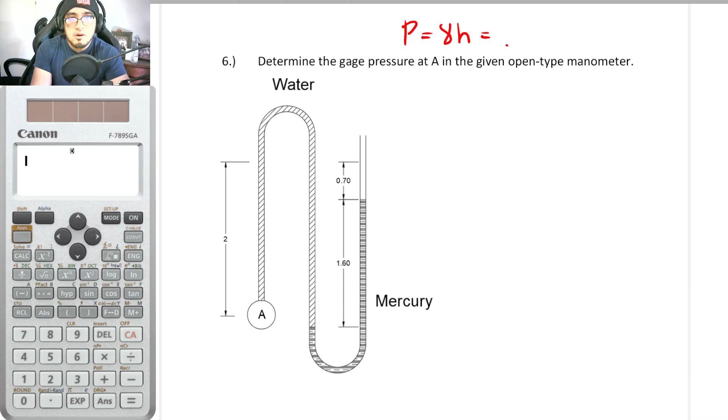Last video lecture was about pressure. Before watching this video, please make sure to have finished the previous video lecture, where we introduced pressure. Pressure is basically equal to unit weight times height, or if given is not unit weight but density, it's rho g h. Rho g is basically just unit weight.

So here, we will now determine the gauge pressure at A in the given open type manometer. This is what you call a manometer, and it is open type because it's open at the top. When it's open, it is subject to atmospheric pressure, which is 101.325 kilopascal. But in this problem, we won't deal with that.

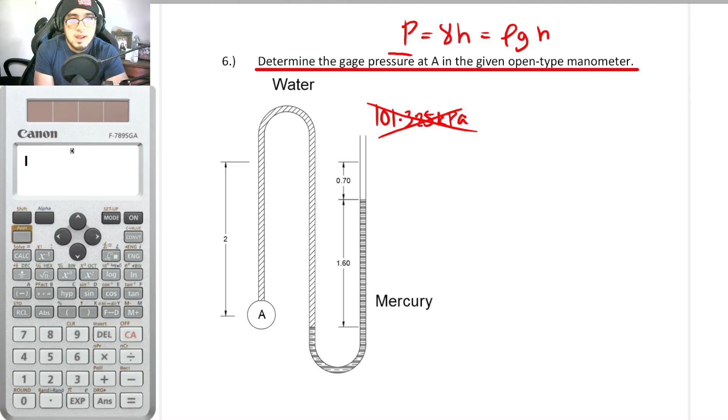That is because we are determining the gauge pressure. In the previous video lecture, I explained that for gauge pressure, the atmospheric pressure should not be included. So whether it's open or not, the atmospheric pressure is not included in gauge pressure.

So how can we deal with this kind of problem? Since rho g h, or unit weight times height, is how we solve this, how can we solve the pressure here? In this part of the manometer, since there's fluid here, of course its weight pushes downward. That is its weight.

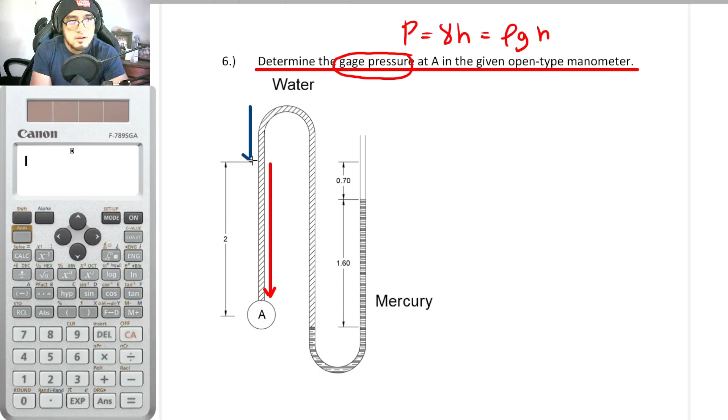As for this one here, it's the same, from this point to this point, going down. That is for these fluids here, going down. However, for this one here, on the other side, up until here, it also goes down. Actually, all of it goes down.

And as for this fluid here going to this point, up until this point, it also goes down. Then here, at this part, it goes down as well, and so on. Actually, all of it goes down, so what is the difference between them?

Take note that this is mercury already, and this one is water. As you can see from the hatching, they are different. So how can we solve for this?

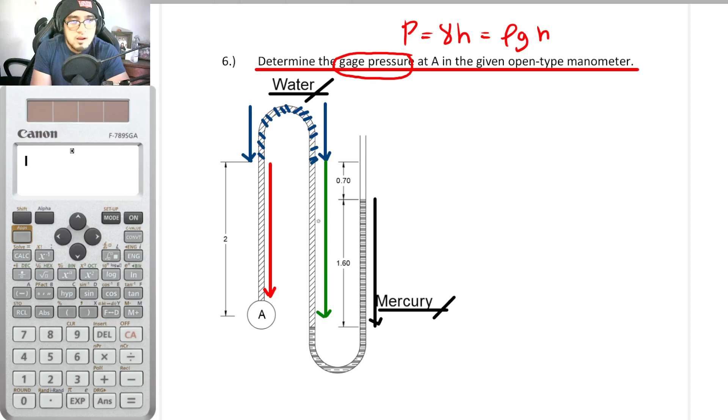For this red part here, the pressure is positive because it is compressing. As for these green ones here, it is negative pressure because it is pulling. So how does that work?

So for us to explain this properly, let us treat this manometer as a straight line. Let me write it on the side. If this is now a straight manometer, let's say this is our gauge value A, and let's make the tube straight. For example, this is the tube, or this is now the manometer.

So let's say that this is the tube. Then let's say that this is now the 2 meter mark, so this is 2 meters. Then whatever this is, I don't know what it is since it's not labeled. Then we also have 0.7 plus 1.6.

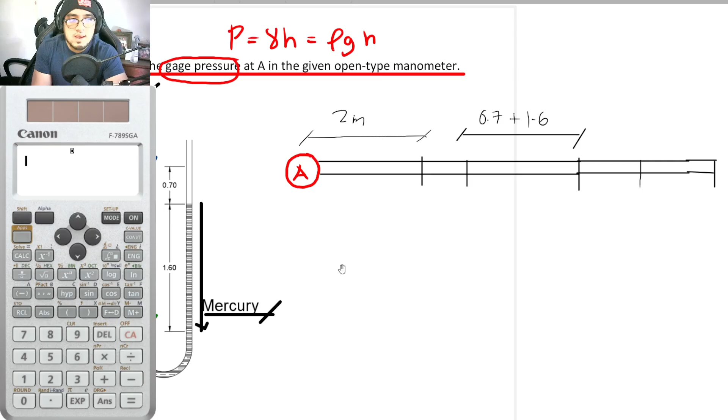Then this 1.6 of mercury, let's say it's around here. So this is now the manometer stretched out. Now that the manometer is stretched out, as you can see, there is a red pressure going to our gauge A. So with that, we again have a pressure, let me repeat.

So we would be having a certain pressure going towards this direction. Then we have this blue part here, going towards the direction of the gauge, which is here. So it goes towards here. Then we also have this part that goes away from the gauge. As you can see, it goes downward but away from A. And with that, guys, that's it. So that's one.

And since, guys, we said that pressure is unit weight times height, and since this is one entity, which is water, and they have the same height, it means these two would just cancel out. So basically they have no use in our computation since they cancel out.

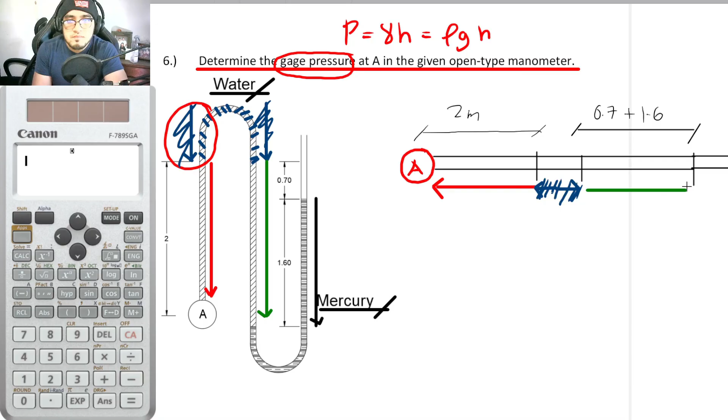As for this, 0.7 plus 1.6, that's still water. And as you can see, it is going downwards. But as you can project, it now goes away from A. So this green part goes away from A. And thus, this is its projection. So it goes away from A.

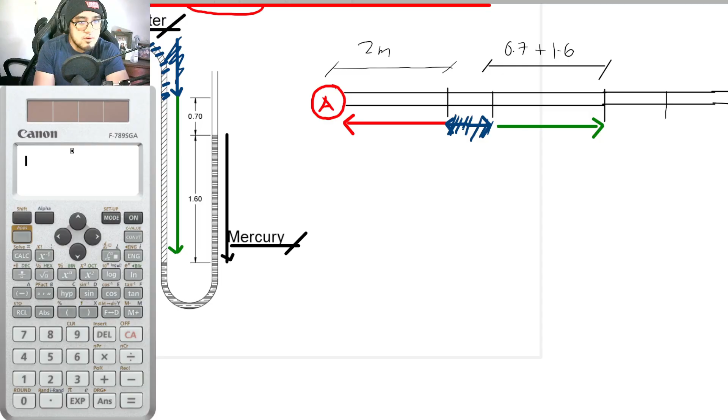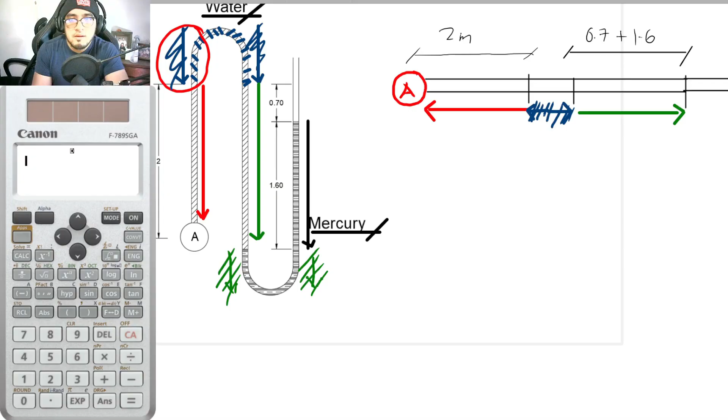As for this one, it's the same. This part here has a downward direction, and this one also has a downward direction. It means they would just cancel out. So this part here goes here, then goes there. So they cancel out as well.

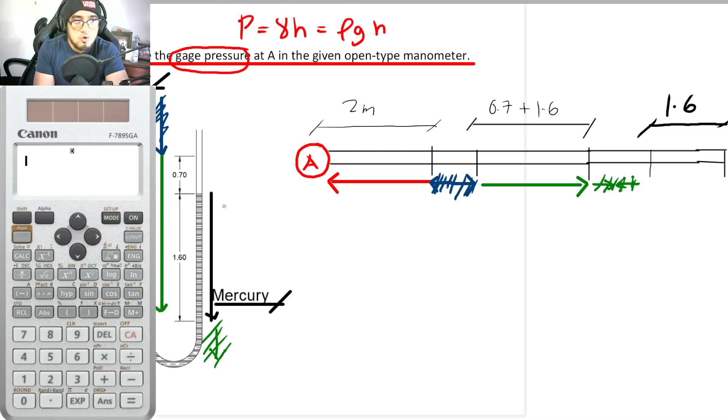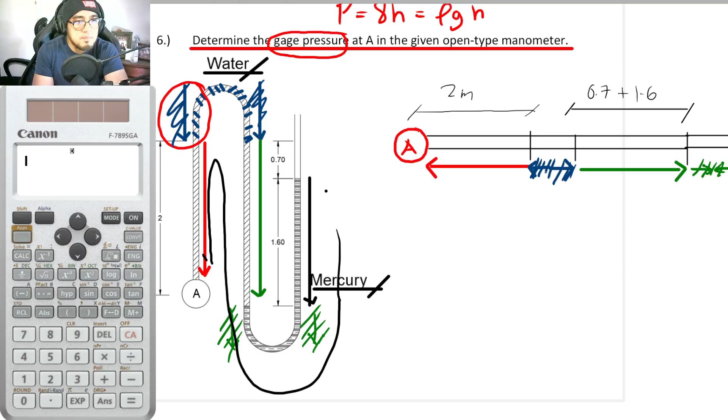And for us to get the pressure at A, we'll place an arbitrary point here, let's say this is also A. What color looks good? Let's use yellow. So this is A, let's say. This is the pressure of A.

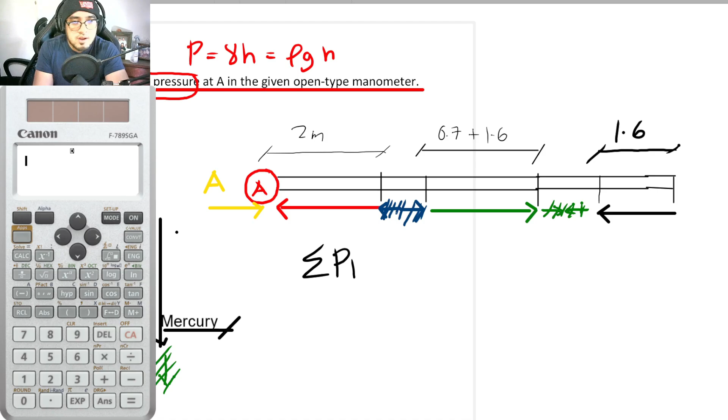Then summation of forces, I mean summation of pressure, horizontal is equal to 0. Let's say to the right is positive. So we have A, minus pressure of water here, then plus, since it's to the right, plus pressure of water here as well, then minus pressure of Mercury. So this is now equal to 0.

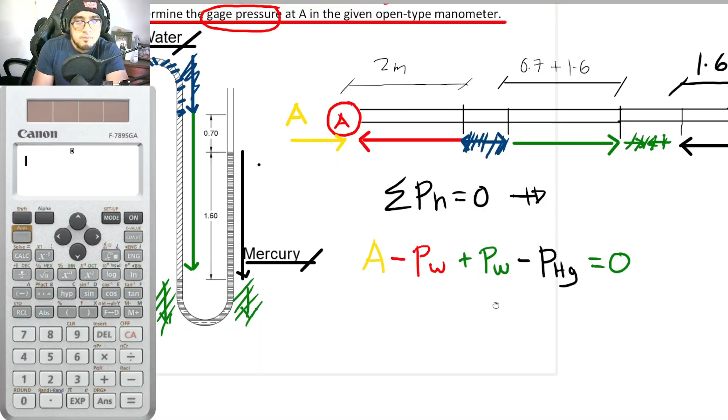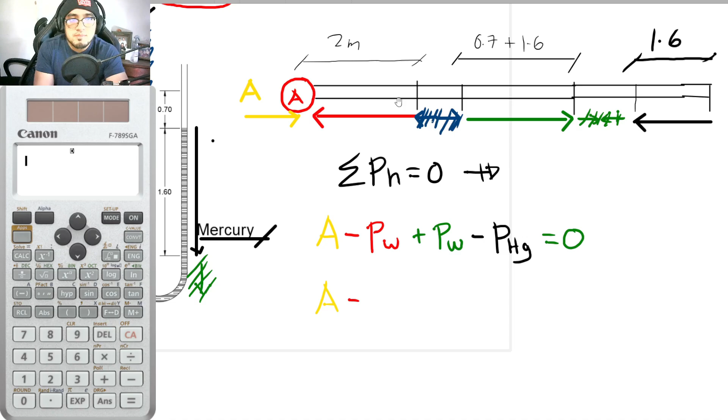Okay, so substituting known values, so still A. A minus the pressure of water at this particular portion, this red portion. So basically that is unit weight times height. The height is 2 meters, and the unit weight, since this is water, is 9.81. Then the height is 2. So plus.

So what is the pressure here? That's still water. So 9.81 times, what is this height? That height is equal to 0.7 plus 1.6. Looking at the calculator, 0.7 plus 1.6, that is 2.3. So that's 2.3. Now we have two terms.

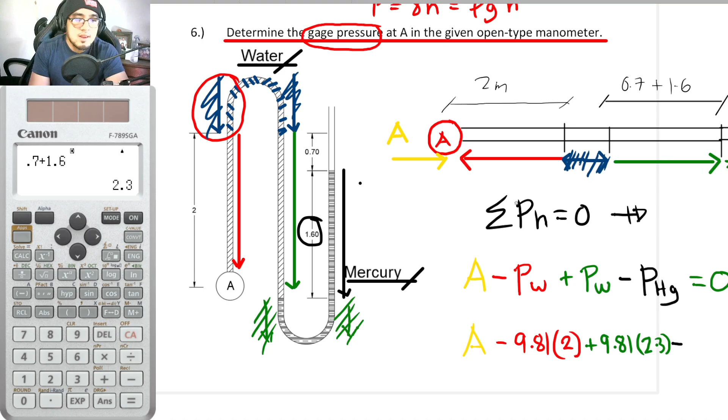And for the Mercury, minus this. So for Mercury, what is that? 1.6 is its height, and its unit weight. For the unit weight of Mercury, remember its specific gravity is 13.6. Unit weight is basically equal to specific gravity times the unit weight of water. So the specific gravity of mercury is 13.6 times the unit weight of water, which is 9.81. This is just the unit weight of mercury, so we multiply this by the height of 1.6, since 1.6 is the height of mercury.

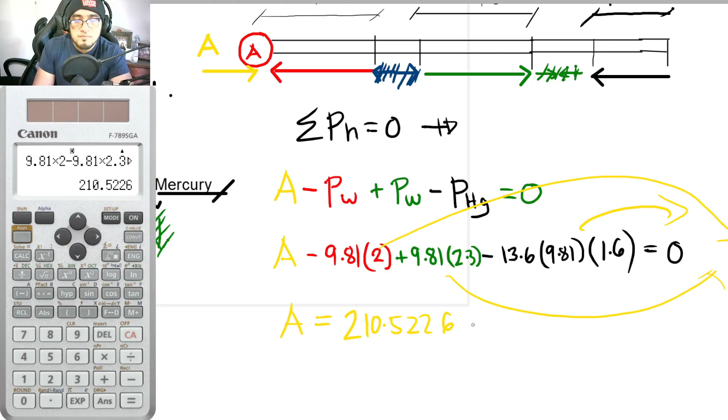Solving for the value of A. Looking at the calculator, let's transpose everything to the other side. You know how to transpose already, and with that the signs will just flip. So 9.81 times 2 minus 9.81 times 2.3, plus 13.6 times 9.81 times 1.6. Our answer here is now equal to 210.5226 kilopascal. So that is our final answer.

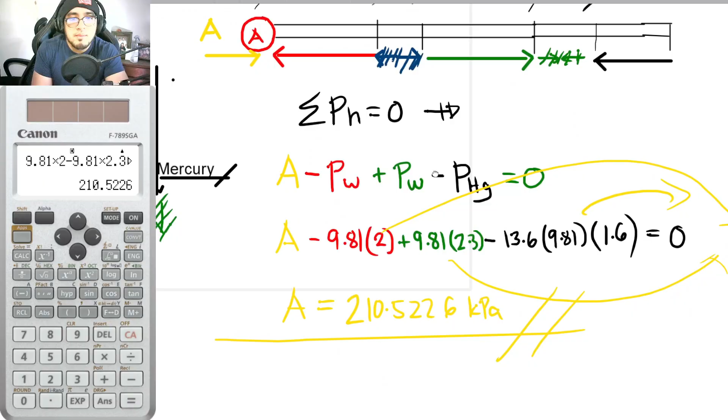Okay, so that is if you would be doing this approach. But once you understand the approach here, we don't really need to do that. Let's erase this again.

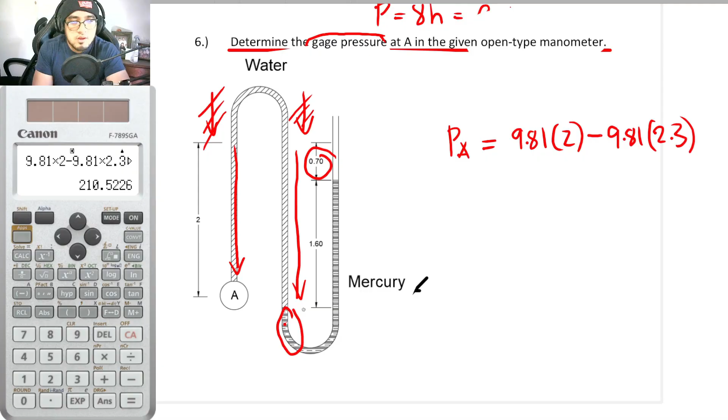Then this part here cancels out again because it's the same material. And this mercury here goes downward, and as you can see, this mercury goes in the direction of A, thus it should be positive.

So positive. Unit weight of mercury, that's 13.6 times unit weight of water, so 9.81. This is the specific gravity of mercury, memorize that. Then this is for water. Then we just multiply by 1.6 for the height. So that's already the pressure at A.

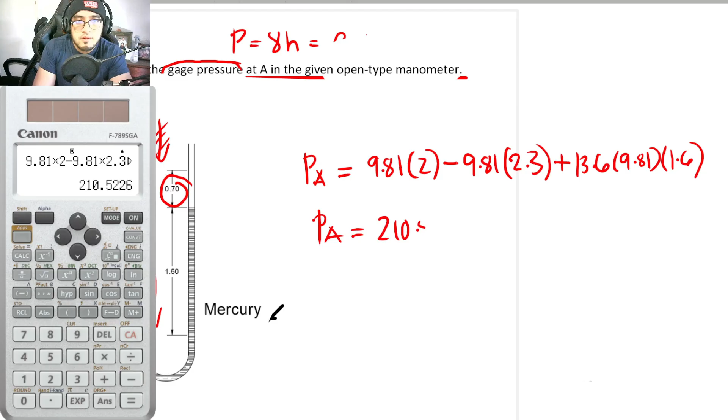As you can see, our solution here is shorter. So 9.81 times 2 minus 9.81 times 2.3 plus 13.6 times 9.81 times 1.6. The answer here is 210.522, so 210.5226. Is it the same as before?

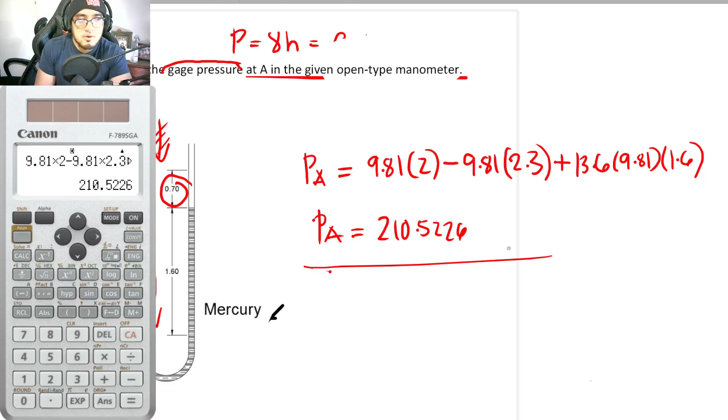Yes, it's the same as before, guys. They are exactly the same. So that's it for this problem. Okay, next problem.

Number 7: in the differential type manometer shown, calculate the difference in the pressures between A and B. This is now the differential type manometer and we have gauge at A and gauge at B. We would now be determining the difference between these pressures.

In this differential type manometer, we have water here. The white is water and the black hatch here, this black here is our oil. And white again for water.

For the unit weight of water, we should already have that memorized, it's 9.81 kilonewtons per cubic meter. And for the unit weight of oil, if you were to ask me, to be honest I don't have that memorized. What I know is the specific gravity of oil.

If it's not given in the problem, the specific gravity of oil is equal to 0.8. Given the specific gravity, it's easy to solve for the unit weight, just by multiplying the specific gravity to the unit weight of water.

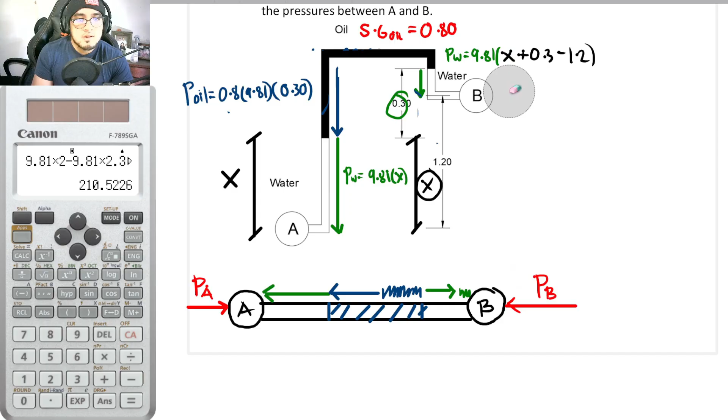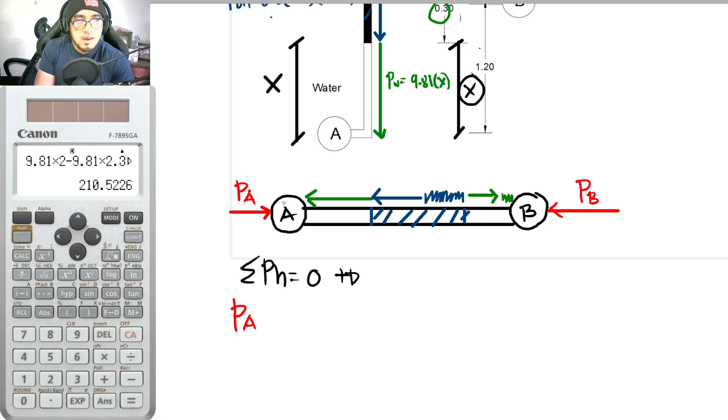So writing it here: summation of pressures horizontal is equal to 0, to the right positive. First, PA, that's positive to the right. And for this, negative, since it's minus. So this is 9.81 times x.

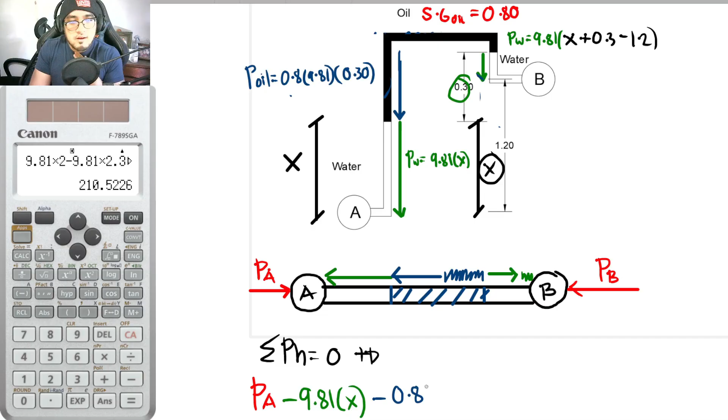And what about for oil? We solved it earlier: 0.8 times 9.81. It's minus since it goes to the left: 0.8 times 9.81 times 0.3. And for this one, the water pressure, it's plus since it goes to the right. So plus PW, or plus 9.81 times (x plus 0.3 minus 1.2).

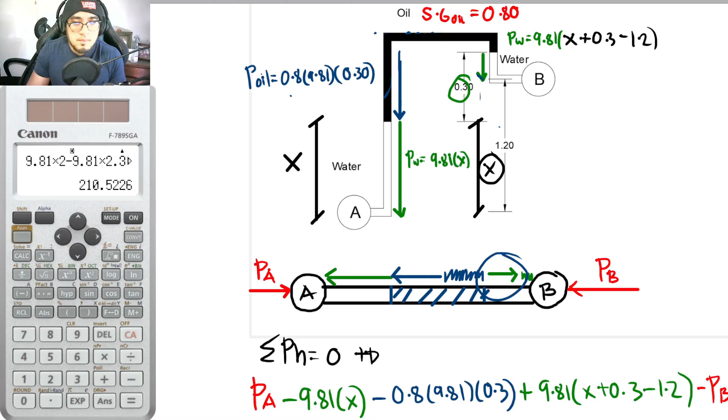Then minus PB. So this is now equal to 0. Okay, let's simplify this. So PA minus 9.81x minus... simplifying this, 0.8 times 9.81 times 0.3.

Our answer here is 2.3544. Plus... let's distribute this. So this is now 9.81x plus, let's combine this: what is 0.3 minus 1.2? That is negative 0.9.

You probably already know where that comes from. So negative 0.9, let me erase this. So with that, this is now negative 0.9 times 9.81, since I distributed the 9.81 to both terms. So this is now negative 8.829.

Minus PB. So this is now equal to 0. As you can see here, negative 9.81x and positive 9.81x cancel out, these two.

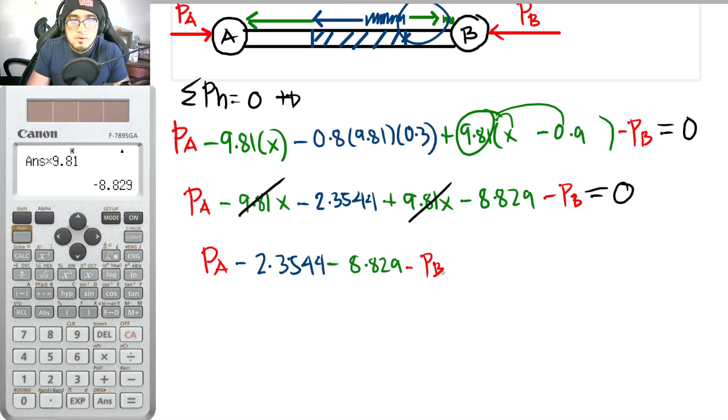The question in the problem is, what is the difference of pressures between A and B? So the difference of pressure is basically PA minus PB. Let's combine these two: minus 2.3544 minus 8.829, this is now equal to 0.

Transposing to get the answer: PA minus PB, or the difference between the two, is now equal to 2.3544 plus 8.829, which equals 11.18 kilo Pascal. So that is our answer for this particular problem.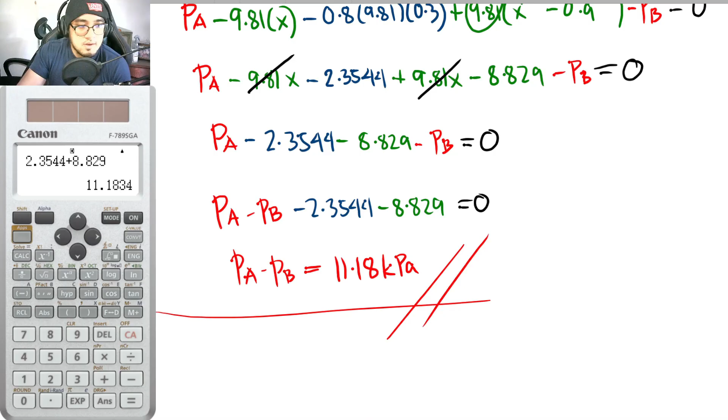So, next problem. If the viscosity of water at 70 degrees Celsius is 0.00402 poise and its specific gravity is 0.978, determine its absolute viscosity in Pascal seconds and its kinematic viscosity in meters squared per second and in Stokes.

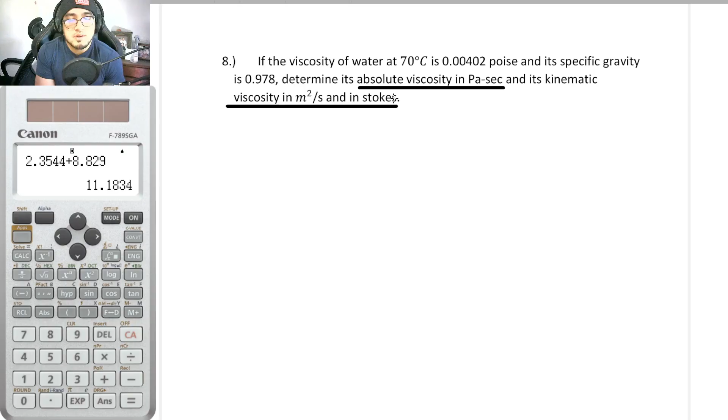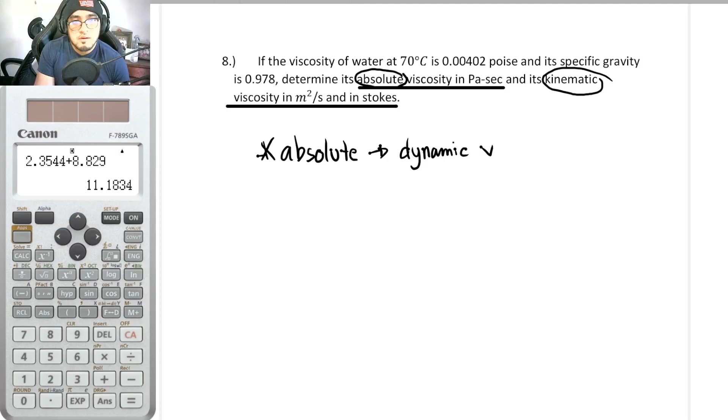Okay, so we have two types of viscosity: the absolute viscosity and the kinematic viscosity. By the way, when we say absolute viscosity, in some cases it is also referred to as the dynamic viscosity. So when we say absolute or dynamic viscosity, that is its thickness or its resistance to internal movement.

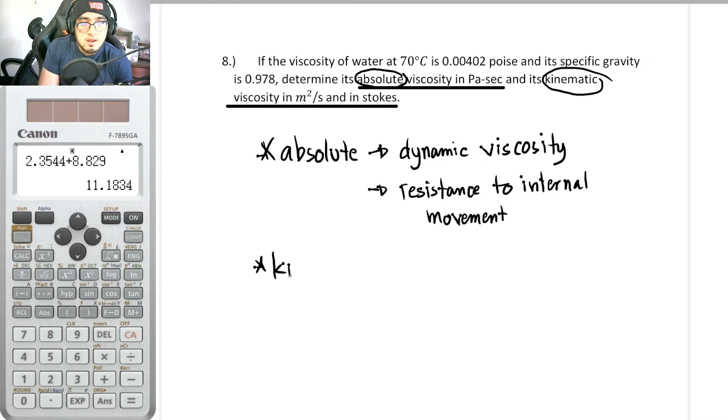So yan po yung absolute viscosity. And when we say kinematic viscosity, this is the ratio. So ilalagay ko yung formula in terms of absolute viscosity divided by the density. So yan po yung pinagkaiba ng absolute viscosity natin and ng kinematic viscosity.

Teka, kunin ko lang po yung formula natin at ilagay ko dito. Okay, so ito na po. By the way guys, dito sa absolute viscosity, resistance to internal movement or flow po pala yan, or in layman's term, yung pagkalapot niya. So the higher the viscosity, mas malapot po siya.

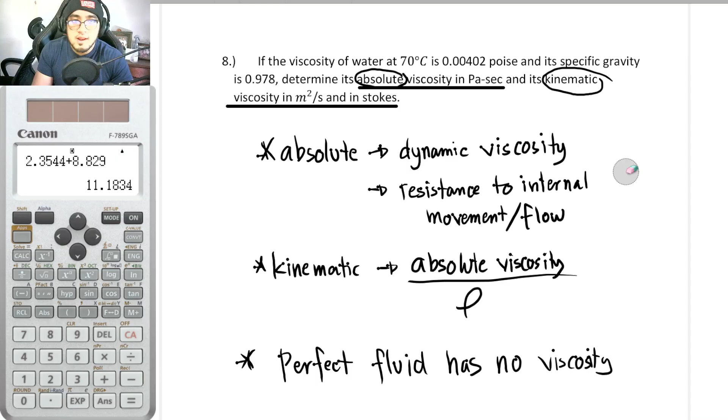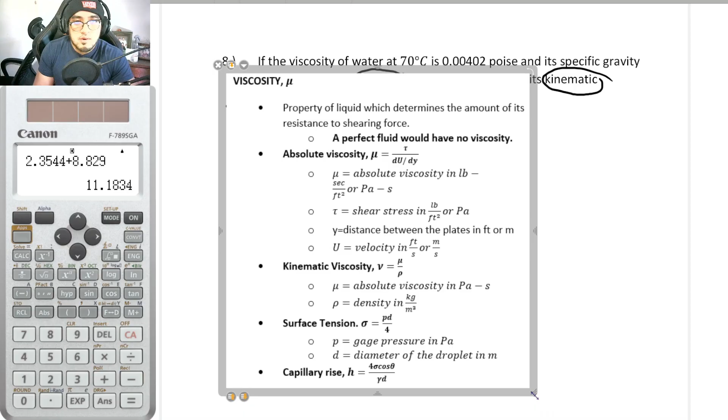And take note that a perfect fluid has no viscosity. So wala po dapat lapot ang perfect na fluid. So ayan po. Di ko na lang sinulat, buburahin ko din lang para magkasya yung ating formula. So ito po yung mga formula natin for viscosity. Ito po yung sinabi ko kanina, a perfect fluid would have no viscosity.

So for absolute viscosity, that is given by the Greek letter mu, that is shear divided by the change in velocity over the change in distance, or du over dy. And for kinematic viscosity, that is basically the absolute viscosity divided by the density. So yun lang po, ganun lang po siya kasimple.

But in here guys, in the problem, wala naman pong binigay na shear stress, wala naman pong binigay na distance between the plate or velocity, wala naman pong binigay na ganun. In our problem, it is already given the viscosity. So sabi po niya dito, if the viscosity of water is 0.00402 poise, basically ito na po mismo yung absolute viscosity natin, that is in terms of poise.

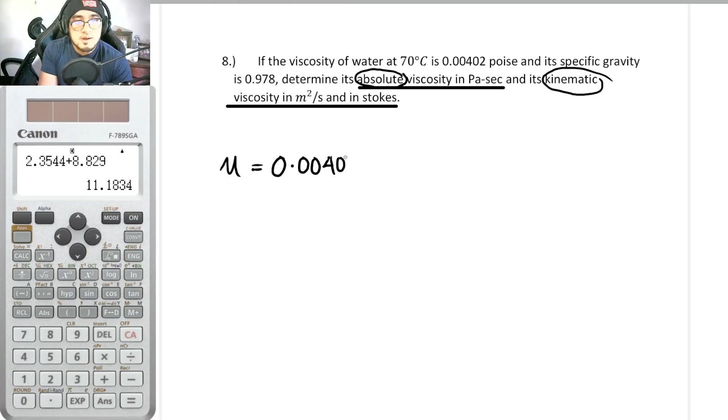So with that guys, mu is equal to 0.00402 poise. So okay, we are now to get the viscosity in terms of Pascal second. So our conversion for poise to Pascal second, kasi ang base unit talaga ng mu natin is in terms of Pascal seconds. And the conversion for 1 poise, meron po tayong 0.1 Pascal second. So yan po yung conversion natin, paki-memorize po yan.

And when we say centipoise, by the way, kapag sinabi po natin centipoise, parang ano din lang po yan, yung pinagkaiba ng meters pati centimeter. So for every 1 poise, meron po tayong 100 centipoise. Parang sa meters, for 1 meter we have 100 centimeters. So yan po yung conversion factor natin.

And since yun po yung hinahanap dito, we would just be converting this. So times po natin to. For every 1 poise, poise would now cancel out, we have 0.1 Pascal seconds. So 0.00402 times 0.1, this is now equal to 0.000402 Pascal seconds. So ito na po yung answer natin for absolute viscosity.

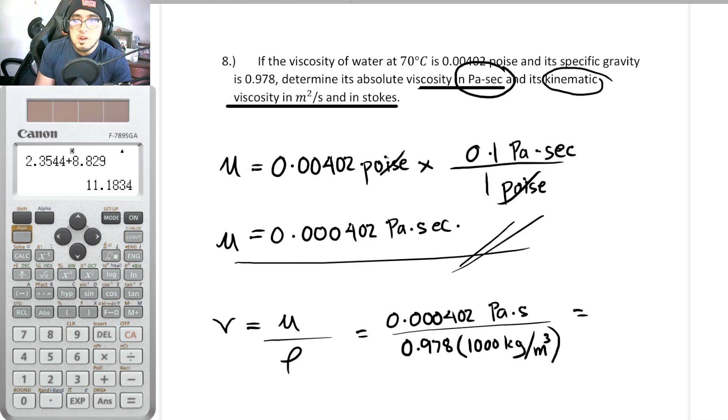So there. And itong Pascal, tawag dito, this is unit conversion tayo. So for Pascal, this is basically equal to newtons per square meter. And ang newtons po, pwede po natin itong mapalitan ng kilogram meter per second squared.

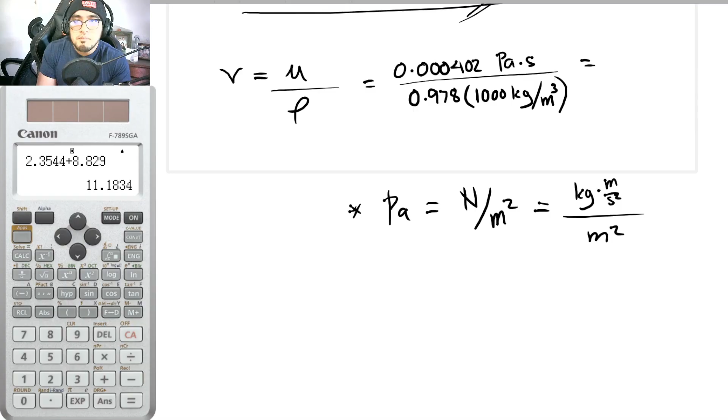So ito po Newton, so divided by meter squared. So yan po yung sa Pascal. So kapag ipapalit po natin siya dito, yung unit ng buong Pascal na yan.

Ilagay po natin dito: kilogram times meter per second squared, divided by meter squared times seconds. Ang magiging labas niyan ay kilogram per meter times seconds. Magka-cancel out itong seconds, magka-cancel out itong kilograms. Then yung meter cube, may meter po dito. Tapos meron na naman pong meter squared dito. So magiging meter na lang po yan.

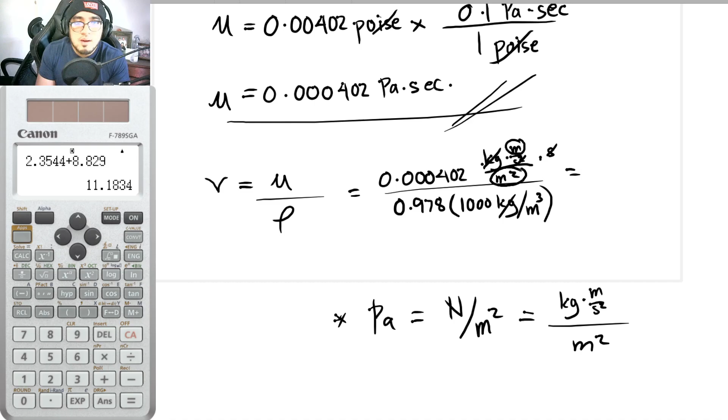Ang magiging labas po niyan na unit is in terms of meter squared per second, kasi ito po tataas po yan. So simple math po, maging ganito po yung unit niyan.

And for meter squared per second, so solving for this one here: 0.000402 divided by 0.978 divided by 1,000. So our answer here is 4.1104 times 10 raised to negative 7 meters squared per second. So that is our first answer.

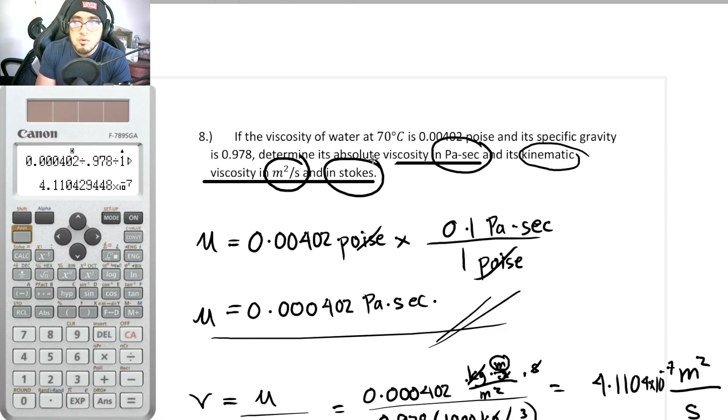So yun po yung unang answer natin, meters squared per second. And in Stokes, what is the conversion factor from meters squared per second to Stokes? So kada isang meter squared per second, for every 1 square meter per second, we have 10,000 Stokes.

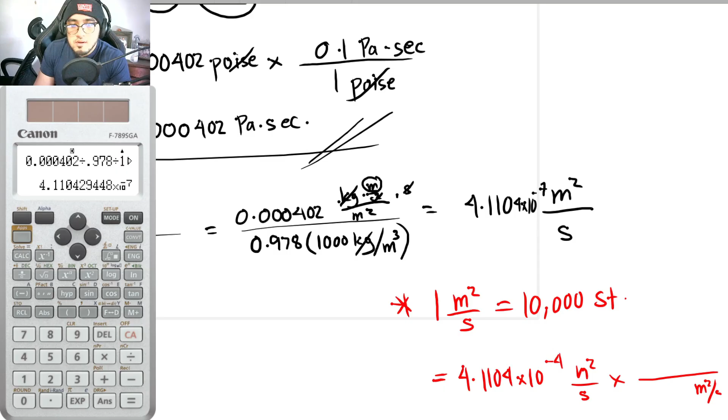So solving for this: 4.1104 times 10 raised to negative 7 meters squared per second, times our conversion factor, dapat meters squared per second din sa baba. For every 1 meter squared per second, we have 10,000 Stokes. So with that, our answer here is now equal to, multiply ko na lang ito by 10,000.

So times 10 to the... ang answer po natin dito is 4.1104 times 10 raised to negative 3 meters squared per second—7 po pala yan. So this is now our final answer for the viscosity problem.

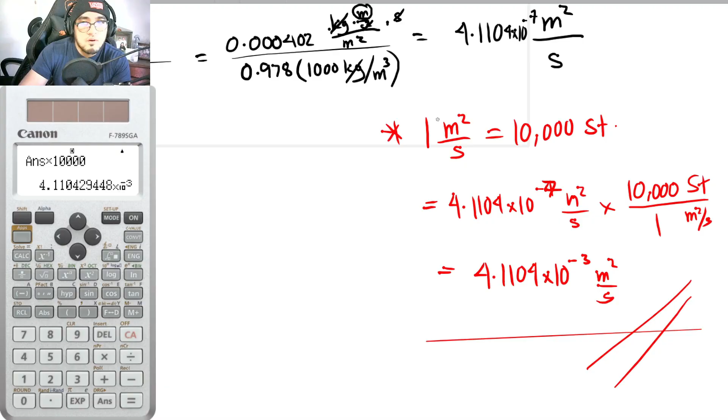Okay, next problem po tayo. Given a temperature of 4 degrees Celsius and a pressure of 184 kilopascal gauge, gauge pressure po ito. If the atmospheric pressure is 101.92 kilopascals, determine the mass density of the element. Given na gas constant R is equal to 2079 joules per kilogram degree Kelvin.

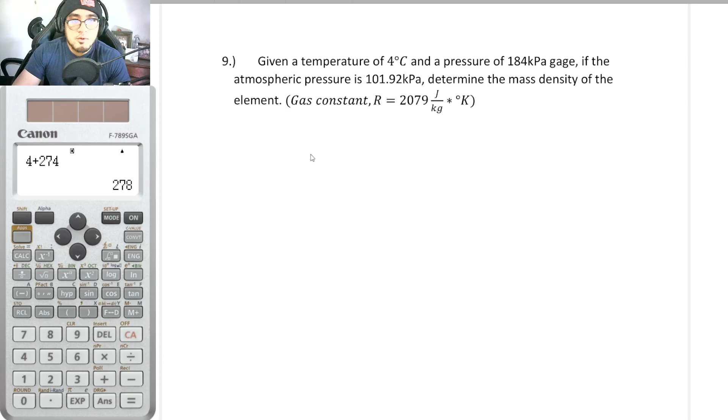Okay, sa mga ganitong problem, isa ito sa mga pinakamadaling problem. We would now be making use of the ideal gas law: rho is equal to P over RT. Pero nung ako ay nag-aaral pa nung nag-boards ako, mas na-memorize ko yung P, or absolute pressure, is equal to rho RT. Ewan ko, parang mas madaling tandaan yung ganito. Pero yung iba naman, rho is equal to P over RT daw. Pwede din yun, so whichever works for you.

So for rho, that is the density. P, that is the pressure, but take note that P must be absolute pressure. So rho is equal to P absolute over RT. R is the gas constant and T is the temperature but it must be in terms of Kelvin. Once again, for the pressure here, it must be absolute—that should be the total pressure, consisting of the gauge pressure and the atmospheric pressure.

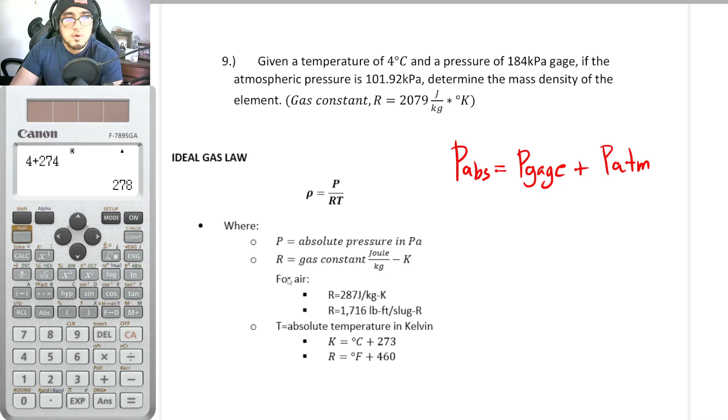Okay, i-delete ko na po itong ideal gas law natin. Ba't ko dinelete? Para lang may space tayo, pero isusulat ko pa rin po dito: rho is equal to P over RT.

So solving for all of the unknowns, rho po yung hinahanap natin dito. So P is equal to, P absolute po dapat yan. For the absolute pressure, ulitin ko lang, that must consist of the gauge pressure, which is already given in the problem as 184 kilopascal, plus the atmospheric pressure, which is also given in the problem as 101.92 kilopascal. Okay, so what if, for example, hindi given yung atmospheric pressure?

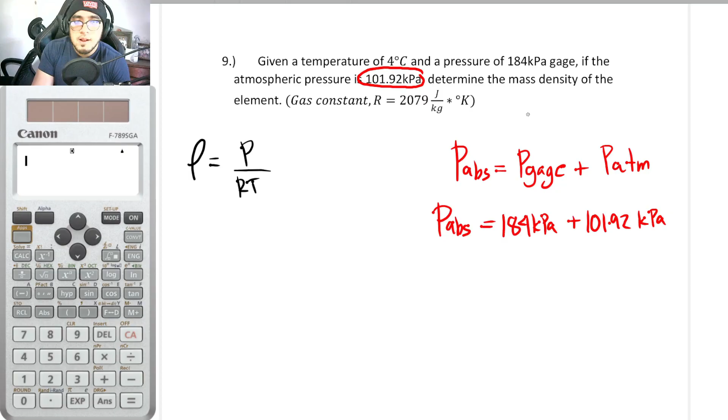If atmospheric pressure is not given, it does not mean that you won't include it. Ibig sabihin po dito, kapag hindi given yung atmospheric pressure, dapat ang pressure na gagamitin niyo by default is 101.325.

Ito po yung default kapag hindi given. So hindi ibig sabihin na kapag wala, hindi nyo na isasama. So kapag walang given, 101.325 kilopascal po yung gagamitin nyo.

And with that, the absolute pressure here is now equal to 184 plus 101.92. So our absolute pressure is 285.92 kilopascals. Okay, so proceeding, that is for absolute pressure.

And for R, yung R naman po, that is already given, and that is 2079 joule per kilogram degrees Kelvin. Take note that ito po given to. And if it is not given, meron din tayong default para sa hangin. But take note guys that this is not air, so may element siya na hindi natin alam, basta ito po yung gas constant niya. Pero if hangin po yung kino-consider natin, the default value of the gas constant is equal to 287 joules per kilogram Kelvin. So ayan, that is now the value for our R.

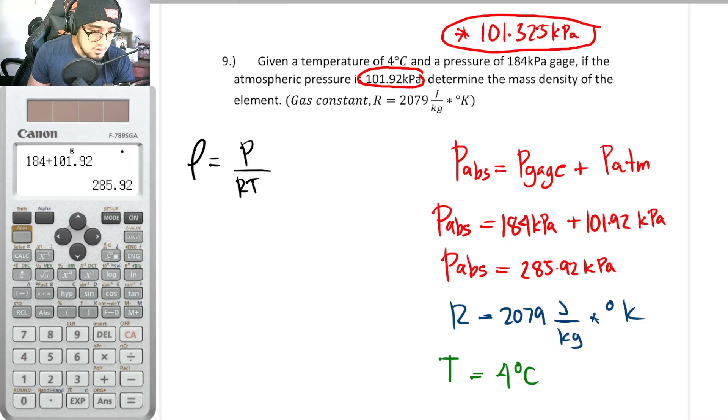Then for the value T, it is also given in the problem that temperature is 4 degrees Celsius. But take note guys, that the temperature must be absolute, so for absolute temperature, dapat naka-Kelvin siya. So for T, dapat 4 degrees Celsius, mag-add ka pa ng 273 para ma-convert siya into Kelvin. So T is now equal to 277 Kelvin. So ito po yung T natin.

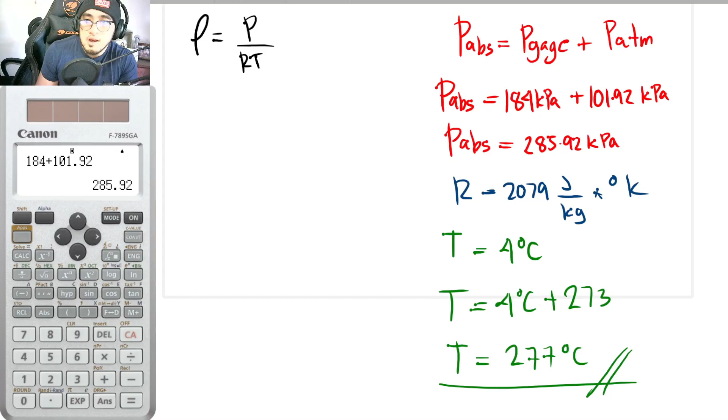So we already have all of the unknowns. Okay, so substituting known values, so this is now rho, this is equal to P. So ito pala yung catch, no? So from the units, kung makikita mo dito, ito naka-joules, ito naka-kilograms, ito naka-Kelvin, and ito naka-kilopascal. So dapat talaga, ito is in terms of Pascal.

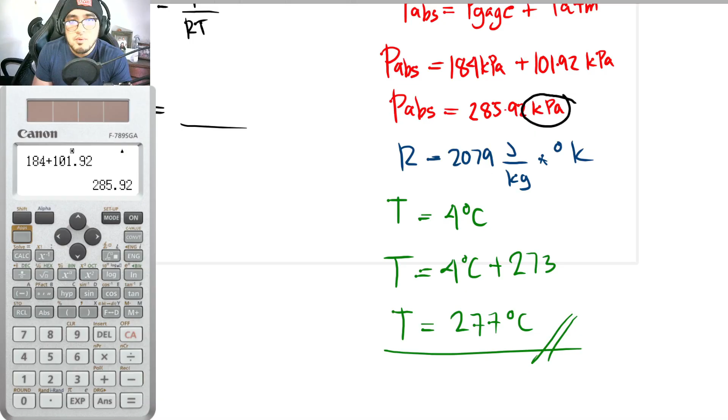So balik tayo sa formula natin. Itong P na to, dapat naka-Pascal yan. Tapos yung gas constant, joule per kilogram Kelvin. Tapos yun, Kelvin dapat yung temperature. So ulitin ko, dapat yung pressure dito dapat naka-Pascal.

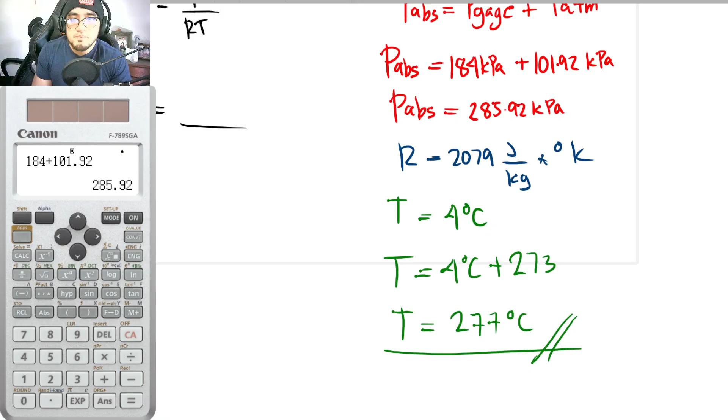Okay, so with that guys, we just convert this into Pascal. So 285.92 kilopascal, times 10 raised to 3 lang yan, so 10 raised to 3 Pascal per kilopascal. Conversion factor lang naman to, alam nyo naman paano mag-convert. Divided by R of 2079 joules per kilogram degree Kelvin times the temperature of 277 Kelvin.

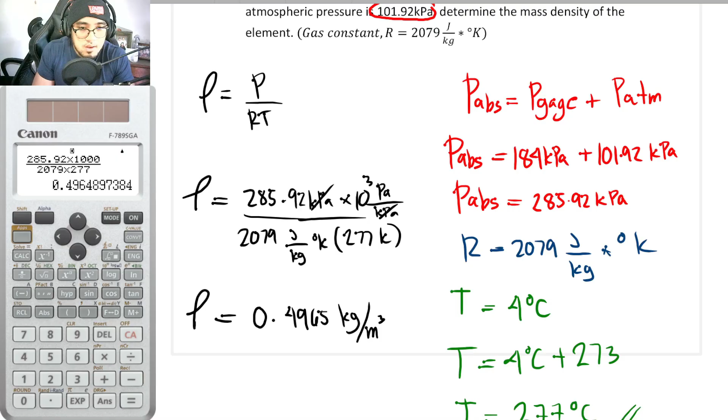Okay, so proceeding, our answer here is now equal to 285.92 times 1000 divided by 2079 times 277. So our answer here is now equal to, density is equal to 0.4965 kilogram per cubic meter. So this is now our final answer for this particular problem.

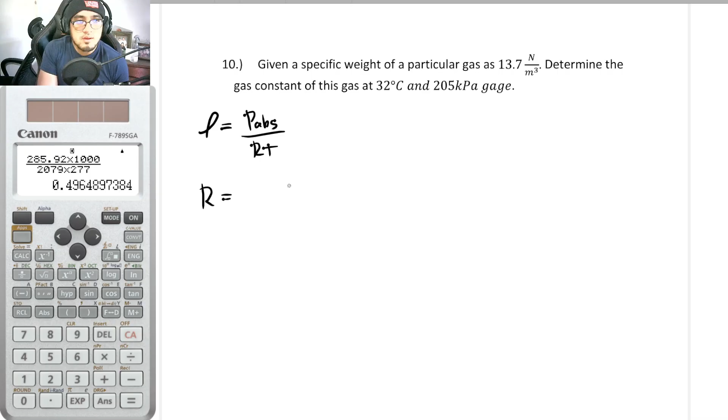Okay, so next problem na naman po tayo. Given a specific weight of a particular gas as 13.7 newtons per cubic meter, determine the gas constant of this gas at 32 degrees Celsius and 205 kilopascal gauge. So once again, ang formula natin is rho is equal to P absolute divided by RT. So ang unknown dyan is R, so R is now equal to the absolute pressure divided by rho T.

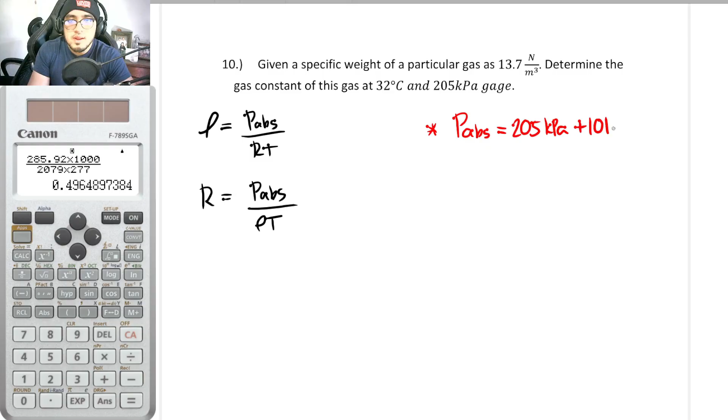So ayan, so what is the absolute pressure? Isa-isahin natin. So the absolute pressure is equal to, meron tayong gauge pressure, 205 kilopascal. Meron po ba tayong atmospheric pressure? Wala pong given, so with that, yung default yung gagamitin natin, 101.325 kilopascal. So this is now equal to 205 plus 101.325. So our answer here is now equal to 306.325 kilopascal. So this is now the absolute pressure.

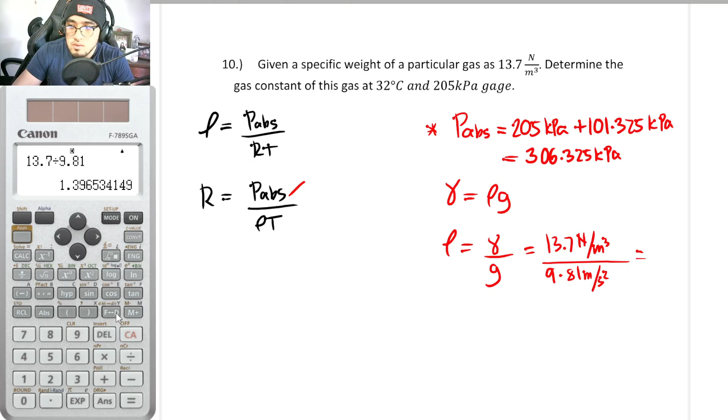So meron na yan, and what about for rho? Wala pong given dito na rho, pero may given na specific weight. As you can remember, unit weight is equal to rho g. Pero wala tayong rho kasi meron naman tayong unit weight. So from this, rho is now equal to unit weight divided by gravity. Unit weight is equal to 13.7 newtons per cubic meter divided by 9.81 meters per second squared. So with that guys, this is now equal to 13.7 divided by 9.81. So our density now is equal to 1.397 kilograms per cubic meter. So yan na po yung rho.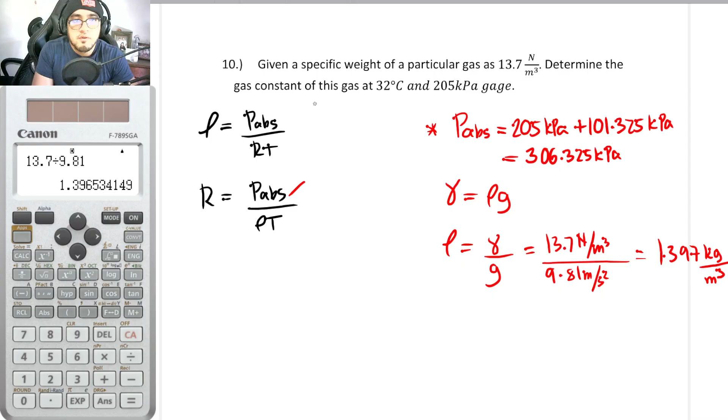So what about for T? For T, temperature natin is equal to 32 degrees Celsius.

Dagdagan lang natin yan ng 273 para maging Kelvin. So 32 plus 273, our answer here is 305. So 305 Kelvin.

Okay, so with that guys, we already have all of the units. Meron na tayo niyan, meron na tayo nito, meron na din tayo nito. So with that, R is now equal to the absolute pressure.

306.325, but take note, kilopascal to, gawin niyo pong pascal, so times 10 raised to 3. Divided by rho, what is the value of rho? That is 1.397. And what is the value of T?

That is 305. So the gas constant R is now equal to, looking at the calculator to your left, 306.325 times 1,000 divided by 1.397 times 305. So our answer here is equal to 718.93. Ano na yung unit nito? Joule per kilogram Kelvin.

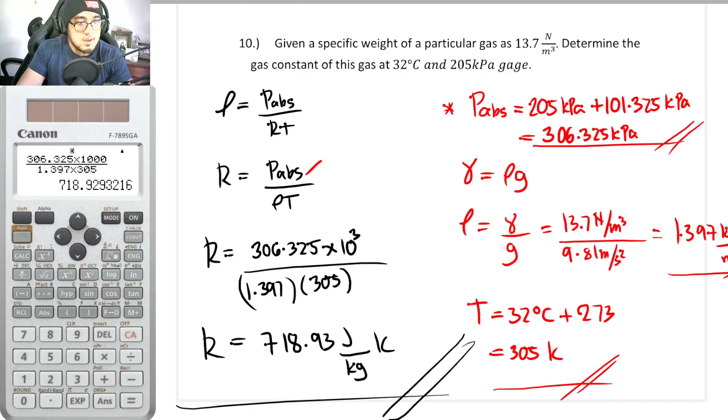How much reduction in volume of water in percent, given an increase in pressure of 13.2 megapascal, if the bulk modulus of elasticity of water is 2.2 gigapascal? So ano po ba ito?

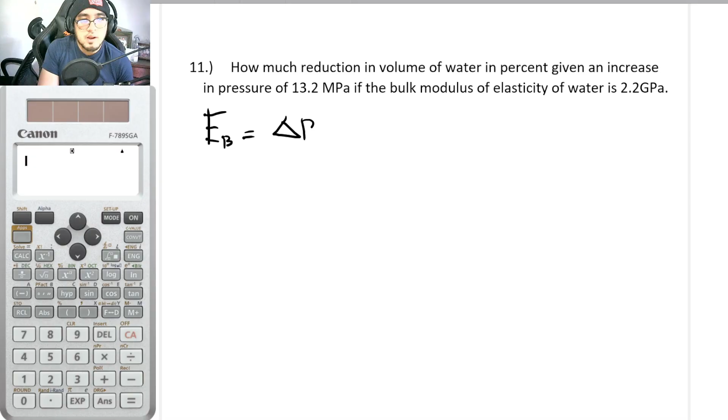So for bulk modulus of elasticity, that is EB. This is given by the formula of the change in pressure divided by the change in volume divided by the original volume. So change in pressure divided by the change in volume over volume.

Edi direct sub. So for EB, binigay naman dito sa problem, that is the bulk modulus of elasticity, 2.2 gigapascal. So for delta P, it is said here that for our water, it has experienced an increase in pressure of 13.2 megapascal. Yung delta P natin, tumaas daw siya ng 13.2 megapascal.

So for example, meron kayong initial pressure. P1 is equal to, let's say, 10. P2 is equal to, let's say, 18. So the change in pressure is equal to P2 minus P1, so that is equal to 8. So yan na yung change in pressure.

Okay, so anyway, teka, may tumatawag sa atin si Idol. Sorry Idol, mamaya na po namin kayo sasagutin. Magbibideo muna ako. Baka pagalitan mo ako pag di ako nag-video eh. Teka, mute ko muna. Nadidistract ako eh, baka namimiss ko na ito eh.

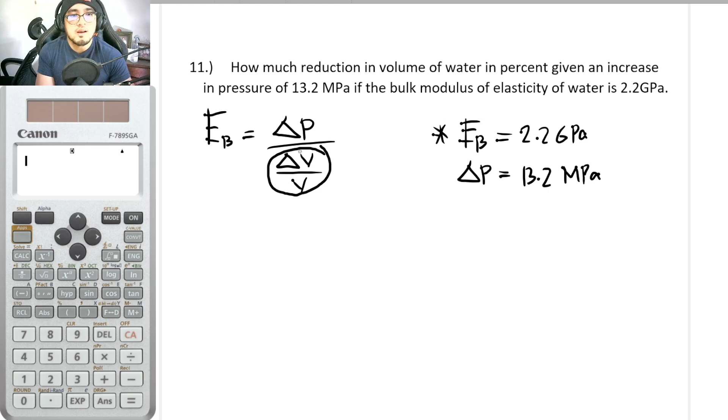So this is now equal to delta P over EB. Substituting known values, this is now equal to 13.2 megapascal divided by EB of 2.2 gigapascal.

But take note guys, we have here an inconsistency of units, so i-convert na lang natin tong gigapascal into megapascal. Ang conversion factor natin, for 1 gigapascal, there are 1,000 megapascals. Now solving for this, 13.2 divided by 2.2 divided by 1,000, so our answer here is now equal to 0.006.

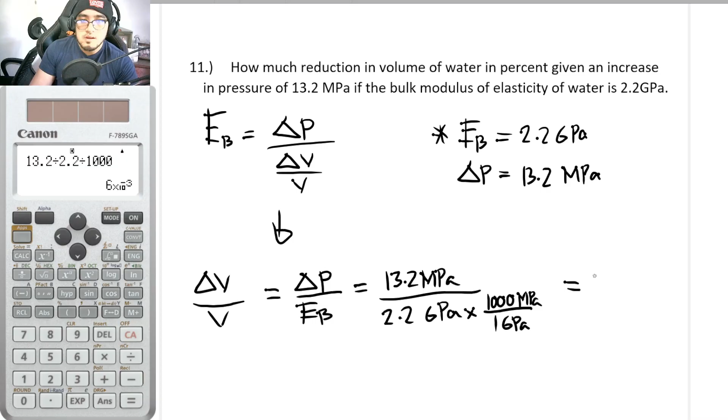So ito po yung answer natin. However, ang tanong dito, in percent daw po. So how much percent is this? So for delta V over V, this is equal to 0.006. In order for us to convert this in terms of percent, just multiply this by 100%. So our answer here is now equal to 0.6%.

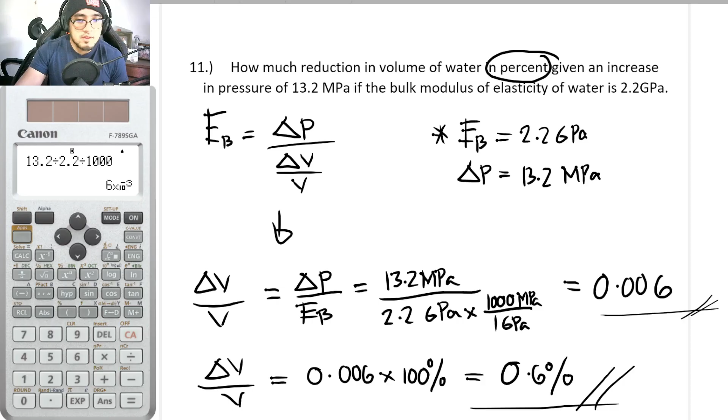So ibig sabihin guys, itong nangyari dito, nung naglagay tayo ng pressure na 13.2 megapascal, lumiit yung fluid natin ng 0.6%. So that is the interpretation of that particular data. So there.